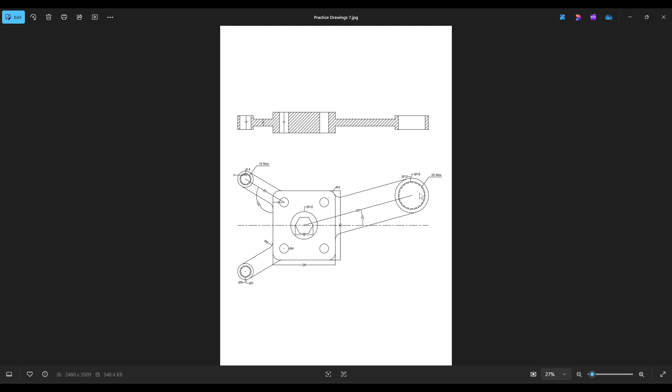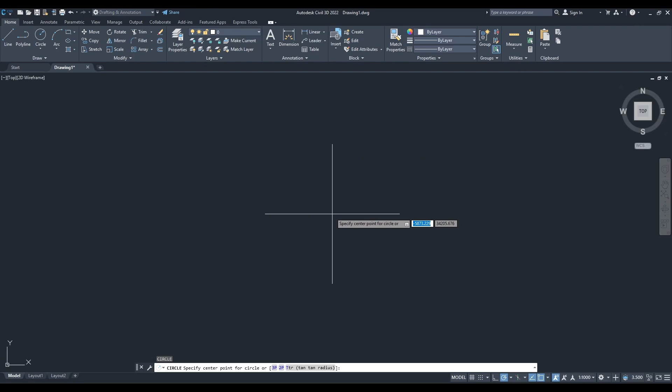Let's start with the circle in the middle. We will expect the alloy wheel to be 25 inches, so we will draw a circle of 25 and enter. Now if we talk about the middle part, it looks like it is around 7 to 8 or 9 inches, so we will just assume it to be 9 inches. For that we will draw a circle of 9 here.

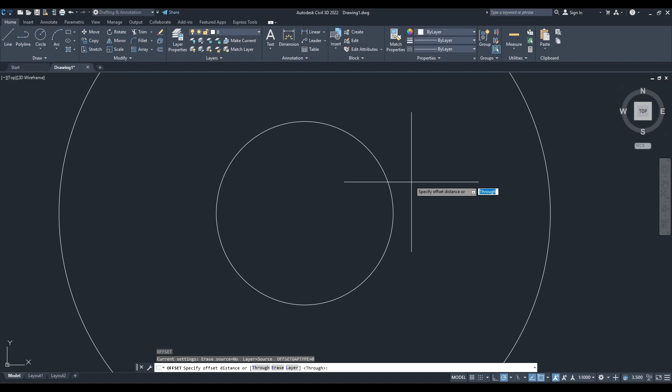Now you see this part here, we will draw that. We will take an offset and give it an offset of 0.5, and here you go. Now we will draw this part, and it looks like it's around 1.5 to 2 inches, so we will make an offset of 2 inches, and again to just cover this, we can take an offset of 0.5 inches so it looks equal.

Okay, now it's time to make this part of the circle. Now as you can see, if you imagine a line from here to here, and then this line, it is of 45 degrees. And this line, if we imagine a line straight from here, it is slightly slanted, of I think 5 to 10 degrees.

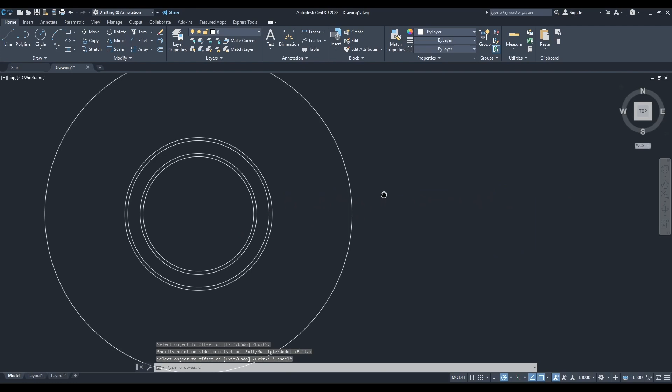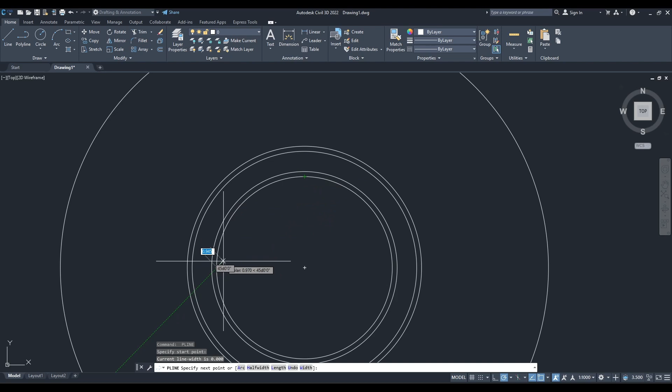So let's just make that first. Take a line command, or you can take the polyline, turn this on, select it to 45 degrees. First we will check the length of this line, because then it will be a perfect fit for this circle. For that we will check the length from this point to this point, and that is 12.728.

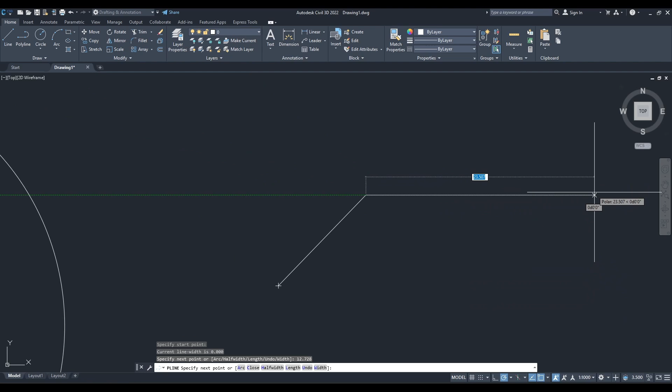Okay, take the polyline, draw a line at 45 degrees, 12.728, and now we will select the 5-degree marker. Now it is 0 degrees, and now I will slightly change its direction and decrease it by 5 degrees, and I will assume its length as 20. Okay, now it is rounded off, so let's give it a fillet, you can give it 2, yeah it looks fine.

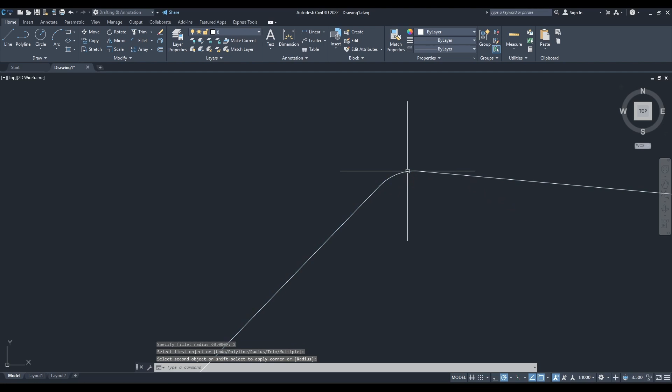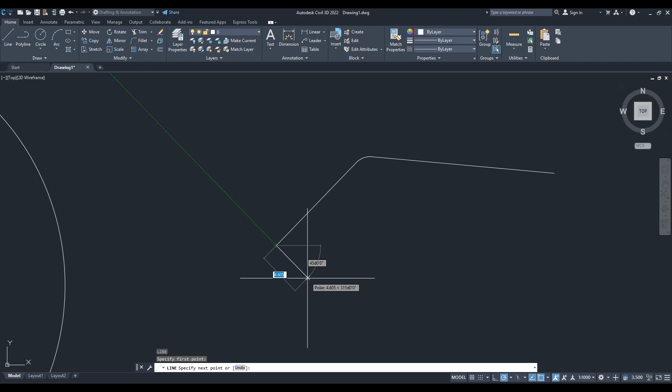And now these two lines also have this difference, so what we can do is draw a line here of 45 degrees, of 20 maybe. Okay, and now we will select this and copy, select this point and give it a distance of 2 and check. Yes, it looks very similar.

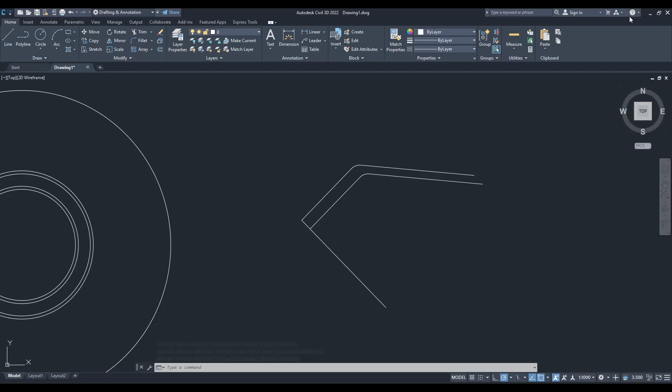This part is a little thinner compared to this part, but these parts look fine, so we will go with this one. Now we select this, copy, and place it at a distance of, let me check, 4 looks fine, 4, and then again and again on this line, and enter the value of 8.

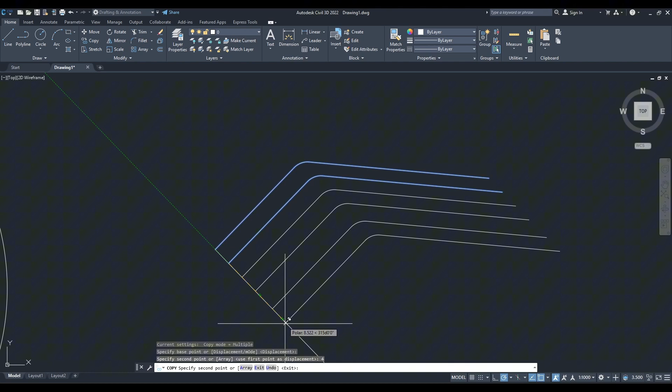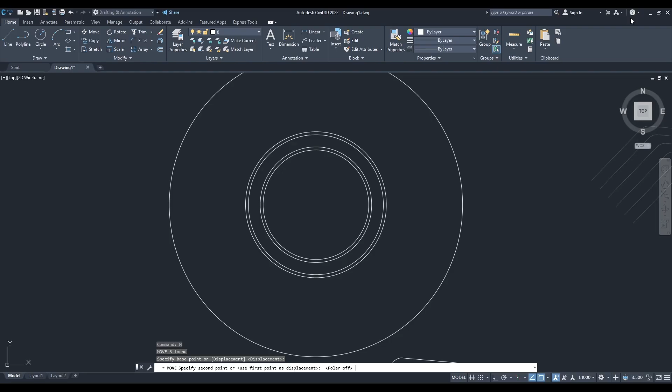Okay, now remove this line and select this, move this, and we will try to place it as similar to this as possible. So this part is less than this part, and this part is also like half of this part. So for that, we will... I think it looks fine here.

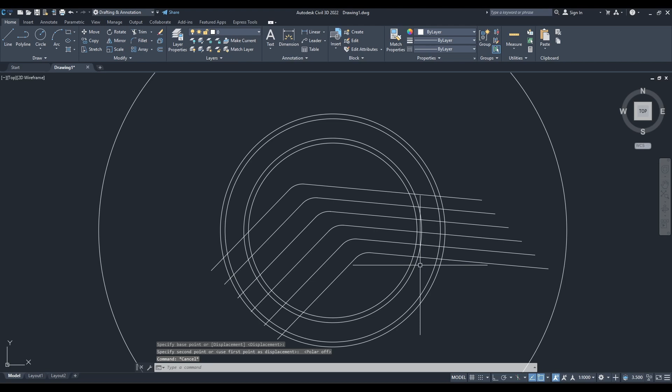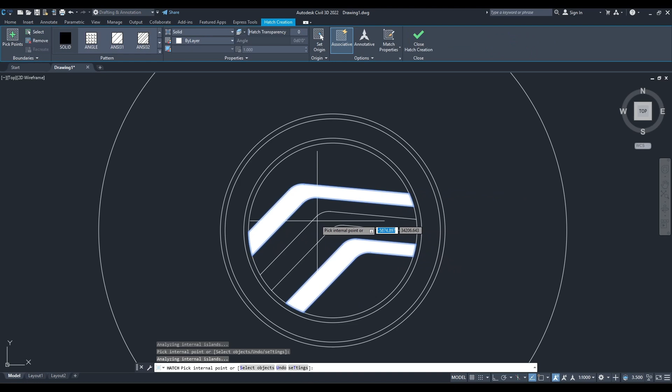Okay, now take the trim command, select this, enter, and trim all these extra lines. And to see it more properly, you can take the hatch command and fill these, and let's see. Yes, it looks similar. Okay, we will go with this one.

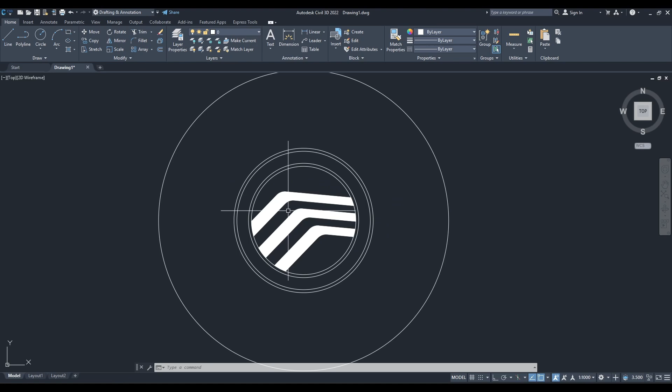Again, this is not the proper dimensions, we are just expecting the dimensions and doing it ourselves just to practice. Okay, now if we move to the next part, you see these rods here that are placed in this manner, and behind them there is one more, and also the distance from this to this rod is like 3 times greater than this one.

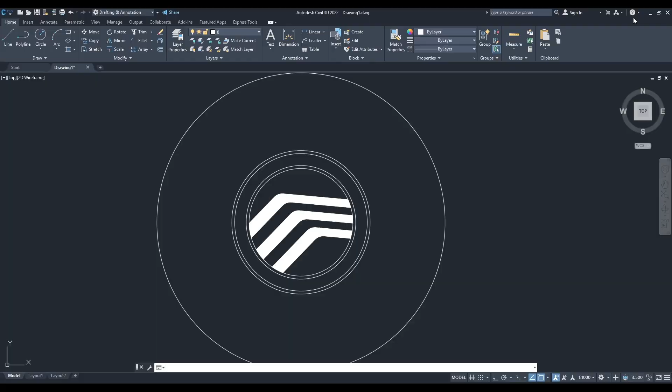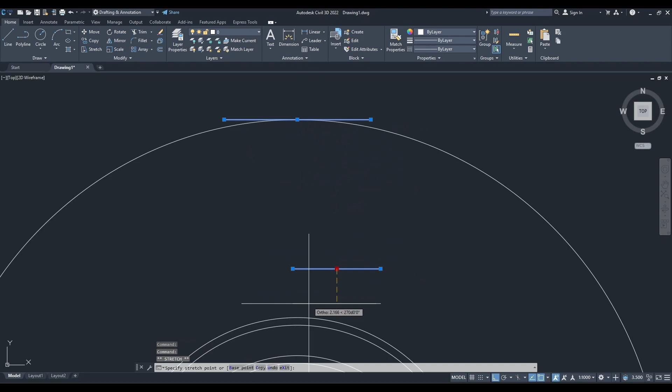So we will have to make this part slightly bigger than this part and make sure they are joined together. For that, take a line, turn ortho on, let's take it of 10, and if there's any problem we will change it afterwards. Then again, let's take it of 6. Now place this line here and this line at this quadrant. Take the line command, turn ortho off, draw a line here and one line here.

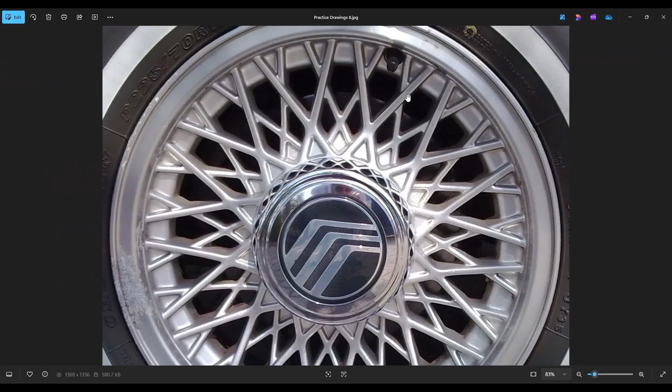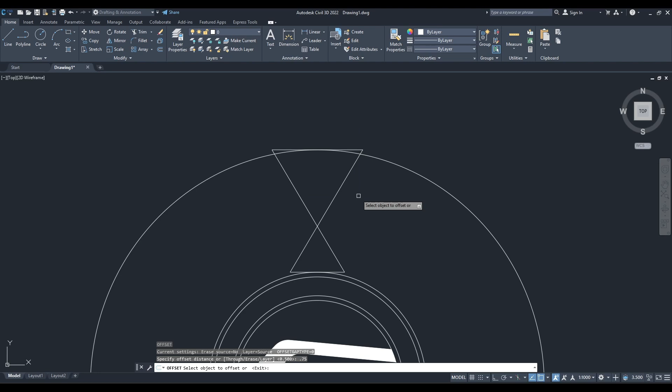Now we want to make those rods. For that, take the offset command, enter 1 - but they look slightly thicker, so undo one step. Let's take 0.75 for this and this. Yeah, now they look fine.

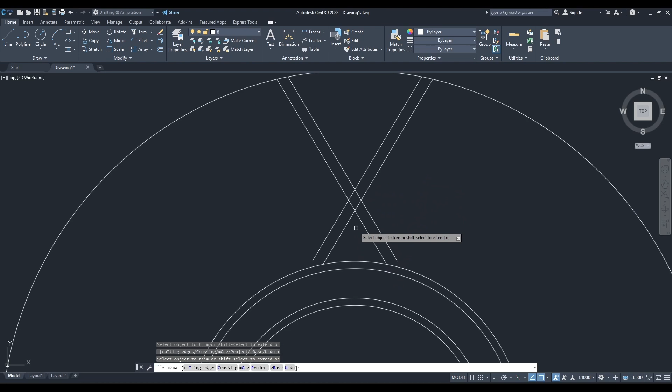Now we'll take the trim command, trim this part, this part, this part, and this part. Now if you are in trim command and you see we have to extend these lines, you can simply hold left shift and put your cursor on the lines to extend them. And we have created this pattern.

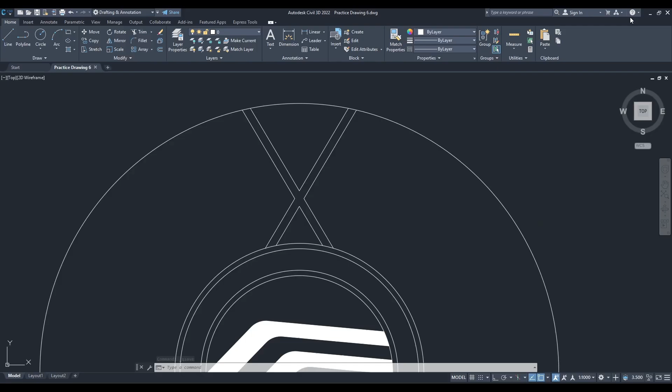Now it's time to join this part with this part. So we can select this, go to rotate command, specify the center, copy, and turn this on. Now we cannot attach this like this because it is not showing us the OSNAP option. So we will turn this on, select the 5-degree marker, and it will place it slightly away from the point, so we can fix it later. As you can see, it is making a little triangle here.

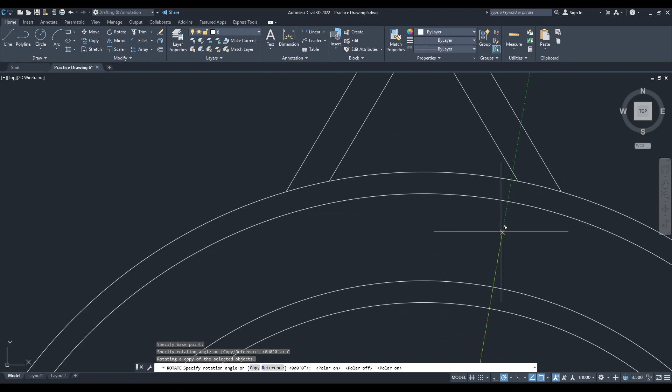Let me show you here, so we can place it here, and again use the trim command and trim this. So this is how we can fix this.

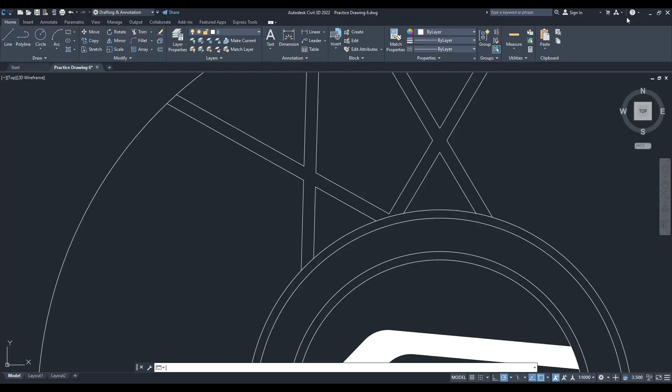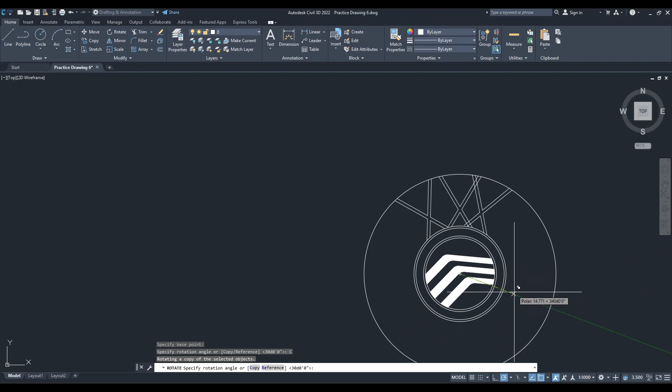Now I want to make this pattern on every side of this. For that we have to trim this part too, so when it comes around and attaches with this part, it will not create a line, it will create this thing. So we have to select this again, take the rotate command, specify the center, copy, and place it exactly when it will make a little triangle.

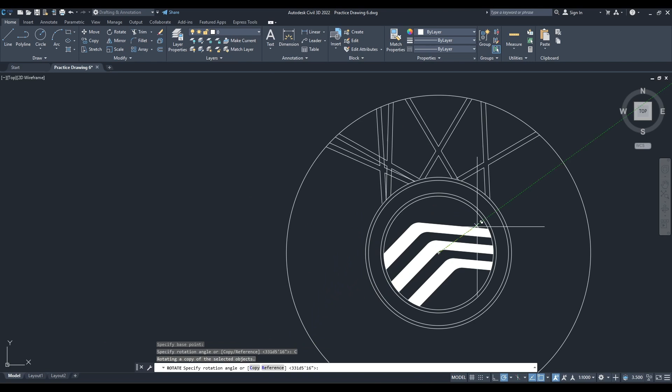Now we will copy once again to the other side, specify the center, copy, and here. Now we will trim this part and this part. Okay, we will select this.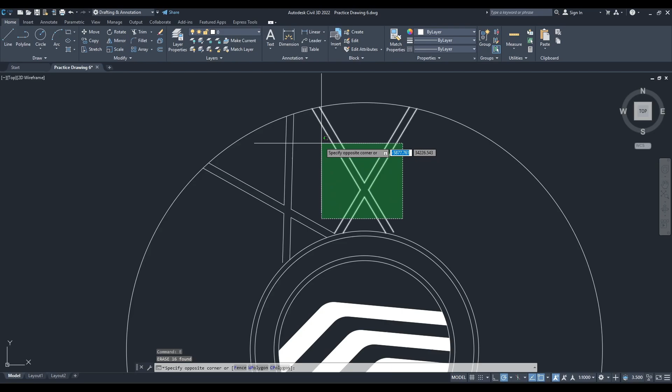And erase this. Now we will make the inner rods. For that we will simply select this, and as you can see they are placed a little bit away from this rod to this rod. For that, rotate again, specify the center, copy and we will place it here.

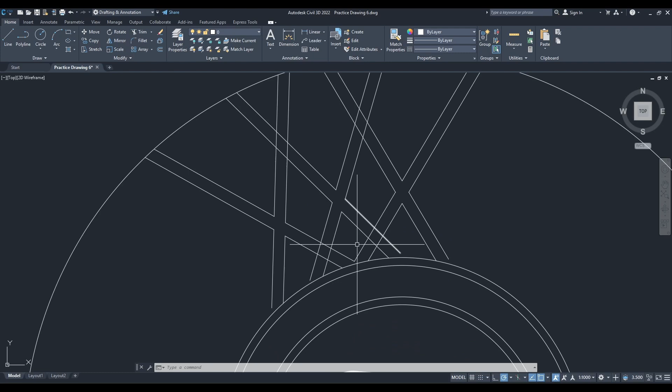And now we will trim this part so the rod that is on top of the other rod will be prominent. This thing and this thing.

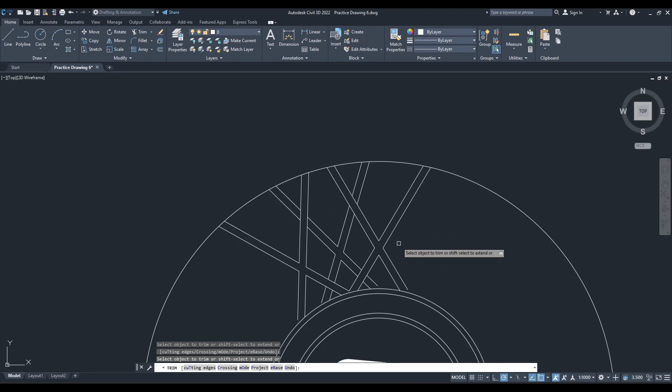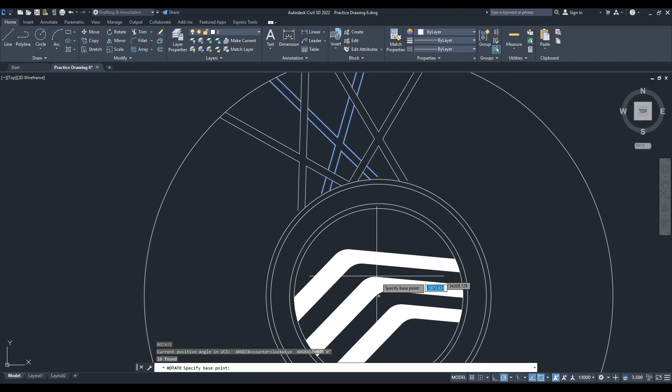Now we will select this again and place a copy of this on the other direction. So specify the center, copy, and here. Okay, extend this, and okay.

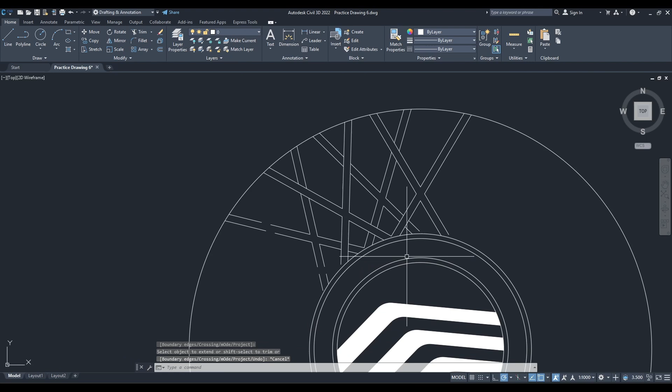Now make sure you select this object and every single line. If you leave any line, the shape we are going to make will not be done properly. Make sure you select every single line.

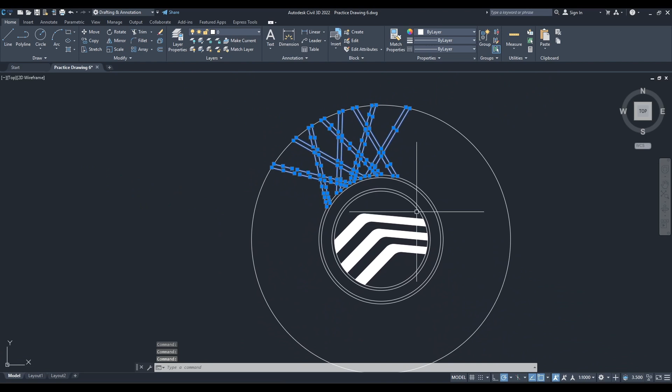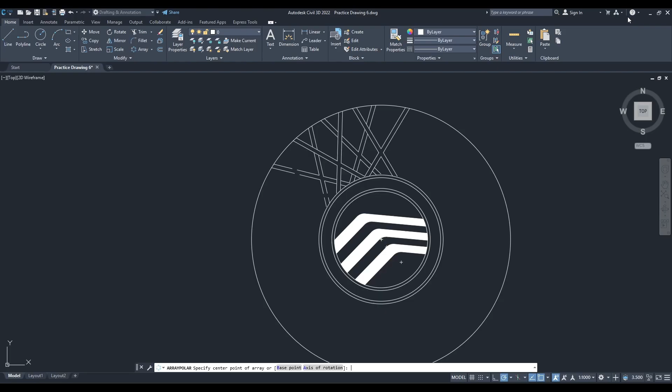Now go to array, use the polar array, specify center, and we have 1, 2, 3 and 4 objects, and we need 12, 12 on the upper side and 12 on the lower side. Select the center and we have created this pattern. So the items were already 6, so 4 multiplied by 6, that is 24. 12 on the upper side and 12 on the lower side, and we have created this pattern.

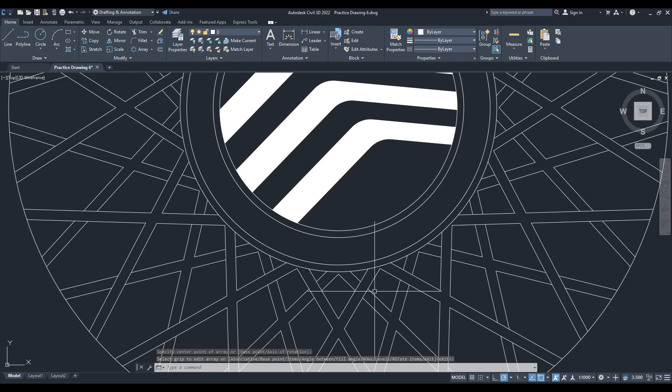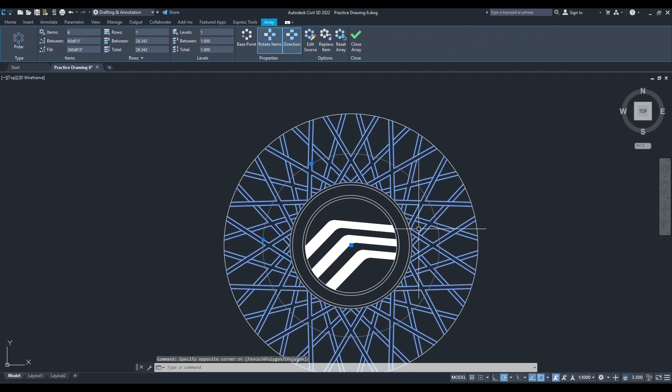Now as you can see, these lines are joined with these lines and these lines are joined with these lines. And if we also try to copy the patterns so the rods are placed here, we can just examine first. This rod is right above this hump. So you can select this, go to the rotate command, make sure you select 5 degrees and specify center, and make sure this part is over this part, and here you go, this part is over this part. So this is how you can make this wheel.

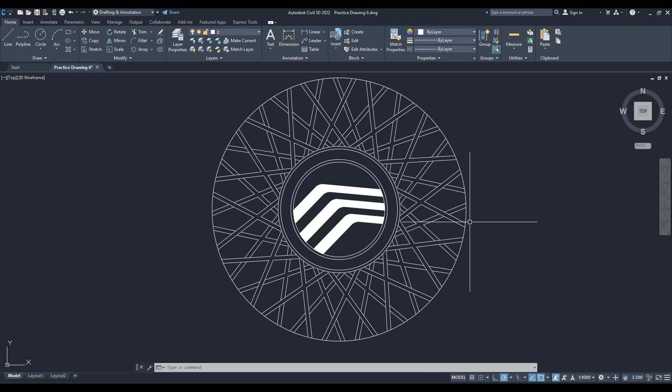And if you do the final touches, we can just increase the size of the wheel. So we will take the offset command and let's take 2, and again offset command and let's take 0.5, and do this, and we have created this pattern.

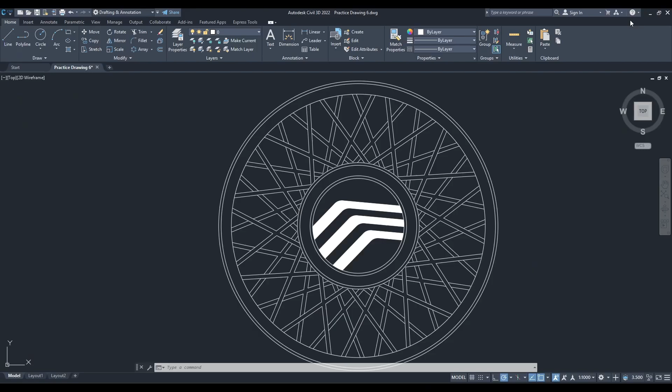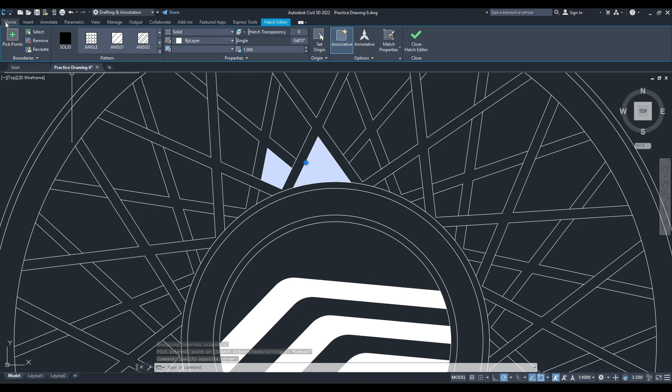And if we want to make these triangles prominent here, we can simply take the hatch command and place it here, this and this, and one is this. Now we can select and again go to polar array, specify the center, make sure they are 12 now, and here you go. Now this is the upper triangle and these are the lower triangle, like here.